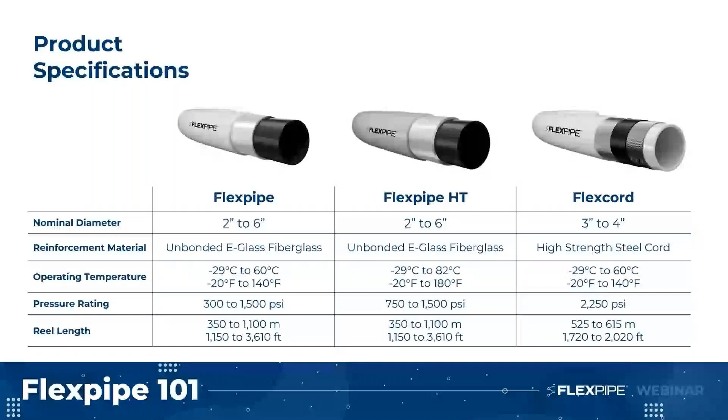So moving on to talking about our fittings. We have 3 different fitting types that we offer. We have a pipe-to-pipe coupling, a flanged end fitting, and a weld neck fitting. The pipe-to-pipe coupling is used to connect 2 reels or 2 pieces of Flexpipe together. The flanged end fitting has lap joint flanges. They're free to spin, so when the bolts are tightened up, it allows for easy connection without stressing any existing flanges. And the last one is the weld neck fitting. This one is used to connect an existing steel pipeline to a Flexpipe pipeline. And these are available in ENC, or electroless nickel coating, or in duplex stainless steel.

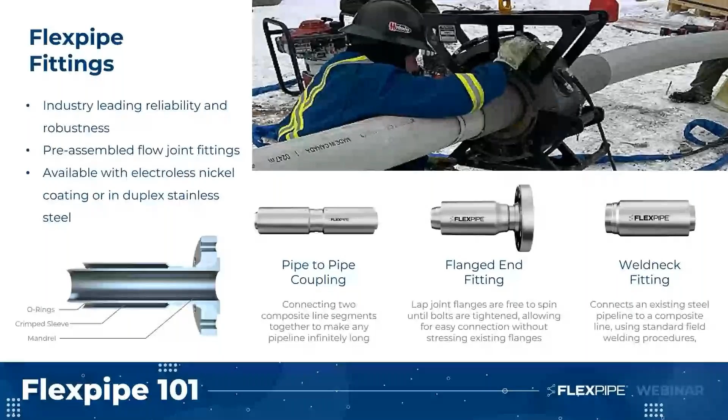So our fittings are designed and tested in accordance with our industry standards. This includes NACE MR0175, or for all my brethren and sisters north of the border, CSA Z662, and also API 15S. Our fittings take around 20 to 50 minutes to connect per coupling, and that depends on the size.

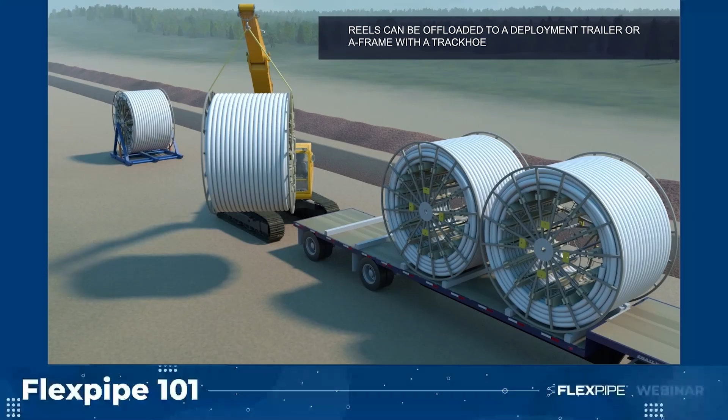So next we'll watch a little video. So trucks can haul anywhere from 2 to 6 reels, depending on the pipe size. Our 2 through 5 inch pipe is on a 12-foot diameter reel, and our 6-inch offering is on a 14-foot diameter reel. Reels can be unloaded with the appropriate weight rated crane, track hoe, or forklift as long as the forks are long enough.

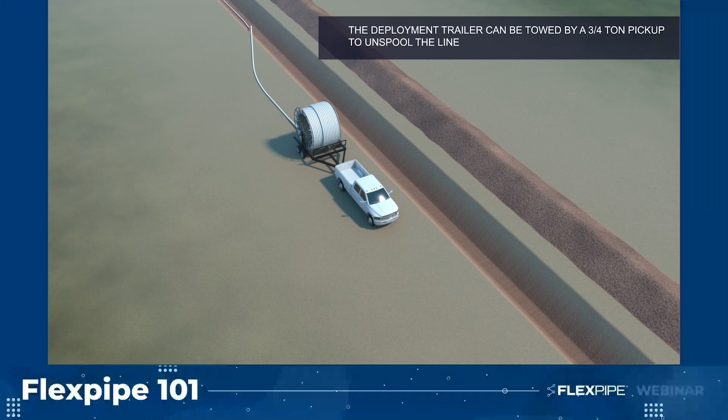We offer a couple of different types of deployment methods. One of them is the deployment trailer. This can be pulled behind a 3/4 ton pickup or other piece of equipment. We also offer stationary A-frames, and these can be deployed with a vehicle as well, or another piece of equipment such as a track hoe or a backhoe.

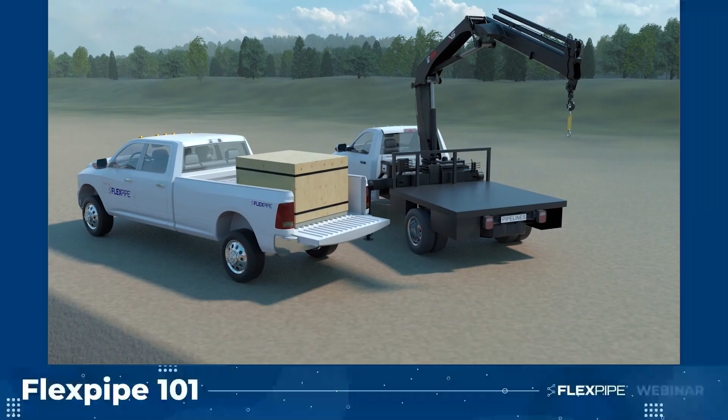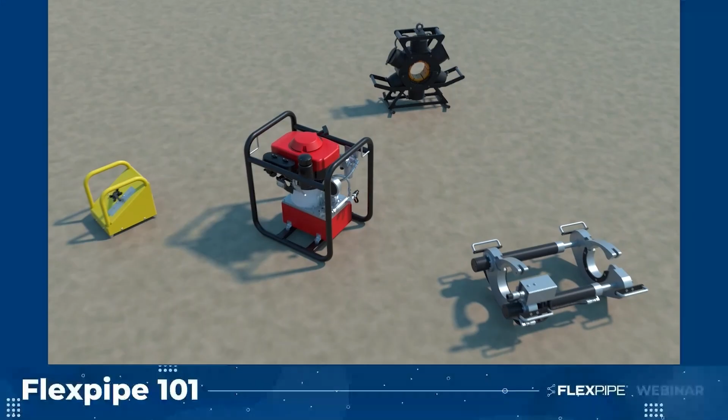Each one of our technicians have their own crimp kit that they'll bring to location, and these crimp kits have 4 major components. There's the power pack unit, the press, the crimper, and the remote valve. We talked about the 3 different types of fittings that we have: the couplings, the flanges, and the weld necks. Our fittings are designed in such a way that once it's inserted, the pipe does not pull away from the sleeve after the fitting procedure has been completed.

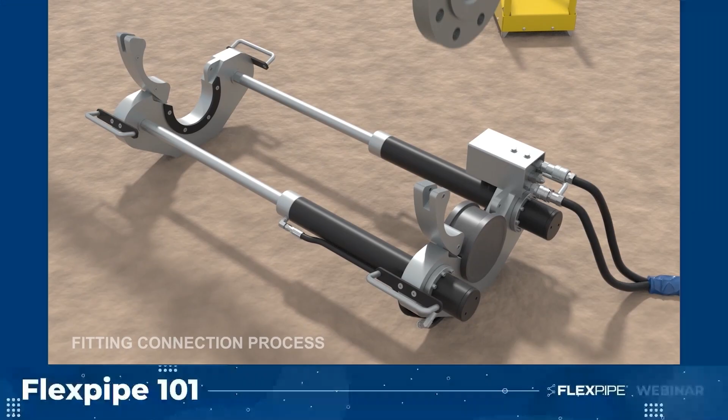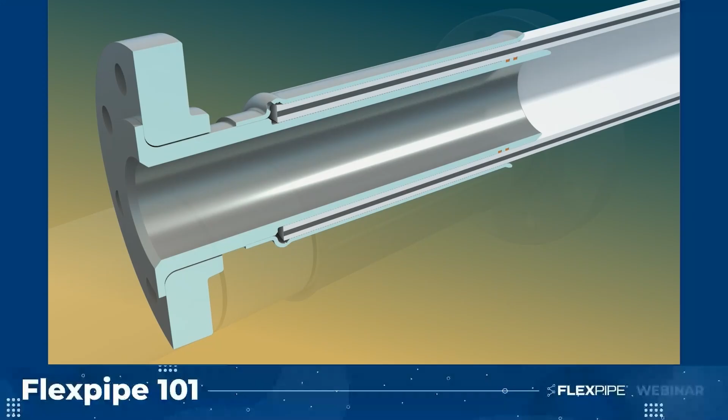Prior to pressing, we put 2 lines on the pipe. One of them is so that the clamp does not interfere with the mandrel. The mandrel sticks out just a little bit further than the sleeve, and we want to make sure that the clamp stays away. The second line is our press line, and we want to make sure that that line is not over inserted into the press. So once the pipe is inserted, the press is disconnected and connected to the power pack and the remote valve. A 4-inch fitting will take 4 crimps.

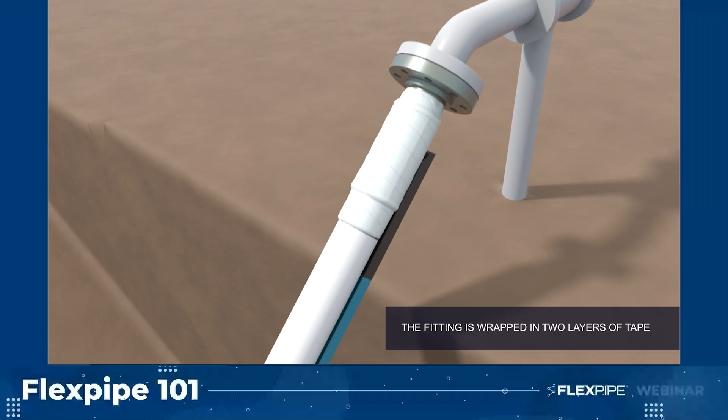Once that fitting is crimped, it'll be wrapped with 2 different types of tape, and at that time it's ready to be bolted up to the other flange or to the riser.

So moving on, we started off in 2001, and composites and Flexpipe have come a long way from where we began. Our first Flexpipe install was in 2003, and since then we've installed 50,000 kilometers of pipe, which is enough to wrap around the entire world. We currently have over 88 million feet of pipe in the ground in the U.S. And our patented composite products are world class, and they're used in various markets and environments around the world. We have installations in over 22 countries around the world, and Flexpipe has combined over 200 years of composite engineering experience and over 100 years of field technician experience.

So where can you find us? We have locations throughout Canada and the US in high operating areas, which makes it convenient for operators. This includes our manufacturing plant in Calgary, as well as our brand new state-of-the-art facility in Dallas, Texas that was commissioned in 2024.

So what is our pipe used for? Mostly our pipe is used for oil, gas, and water, and we do have a few other applications. For oil, we're looking at crude oil and emulsions, H2S, zero flaring. Water: source water, disposal lines, water injection, water transfer. For gas: distribution, fuel and lift gas lines, hydrogen and helium, 100% CO2, and biogas. Some of the other applications we've been used for: mining slurry, diesel and refined chemicals.

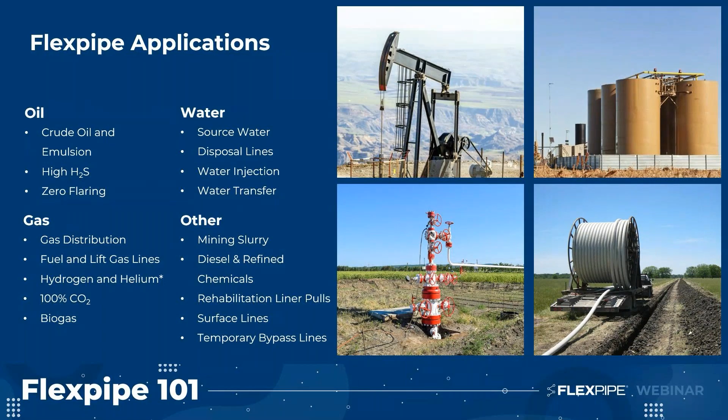We've also been used for rehabilitation liner pulls. This has become quite popular over the past several years, where we can take our pipe and pull through an existing failed steel line. We're also used on surface lines as well as temporary bypass lines.

For deployment methods, trenching is the most common installation method that's used for spoolable composites. Basically, the installation can go just about as fast as the ditch can be opened up. Next popular one is surface lines. And this is due to the low cost and the short time required to install the pipeline. And it is possible to deploy up to 25 to 50% faster than steel.

Plowing and chain ditching are also very successful, especially in areas with little pipeline infrastructure. This is due to low impact and the installation pace. As you can see in these photos, there are little right-of-ways required for these methods, and it's possible to install up to 2,000 to 4,000 meters a day in this manner.

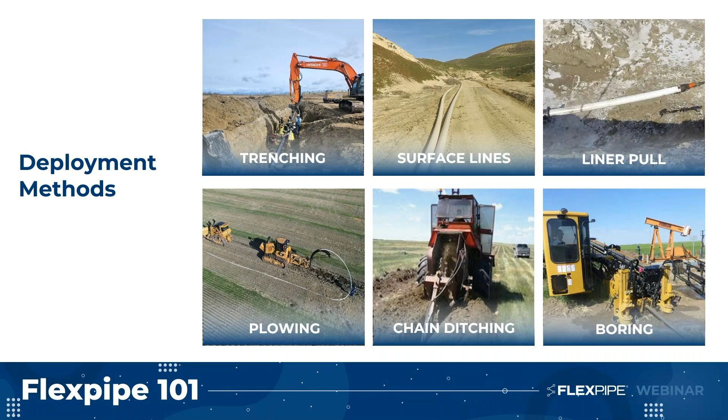Horizontal directional drilling or boring has typically been used for road or terrain crossings, but it has become the preferred method for some users due to the minimal environmental impact. In most applications, it's reasonable to pull 2 full reels of pipe to an existing line, and in some instances, we've achieved even longer.

So benefits of FlexPipe. Lower life cycle costs for the total life of the pipe. This includes installation and operational. This is compared to steel. HDPE, or high density polyethylene, is resistant to corrosion, has a very low coefficient of friction, and so there's a lot less abrasion. Our spoolable pipe comes in long lengths, therefore you're using less connections, and fittings are fast to install and repeatable. Our pipe provides industry-leading reliability and very robust testing.

We follow all industry standards, and we also offer a digital solution to keep track of your installations and your product inventory. We train contractors, and our team provides support through the entire installation process, starting with the account managers to the project coordinators, application engineers, field technicians, and our employees at our local service centers around the country. Narrow right-of-ways create less environmental disturbance. So this is suitable for lower impact installation like HDDs and plows.

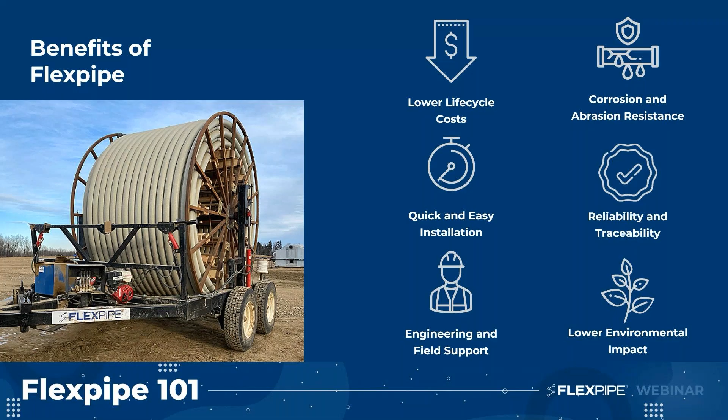And our manufacturing process is less harmful than steel, leaving no epoxies or harmful resins in the air. And the long length reels allow for less trucking. So comparing a 4-inch pipeline cost, steel to FlexPipe, you can expect a 20% reduction in the overall cost compared to the steel, as well as a 30% lower installation cost. And this is namely due to smaller crew sizes, less equipment, and faster deployment.

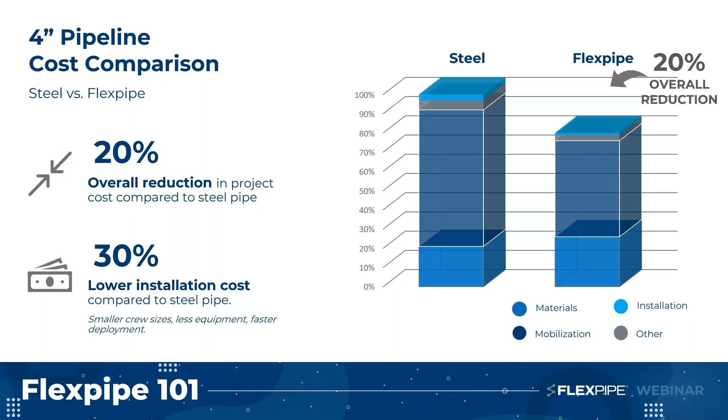This next slide highlights the difference between a 4-inch steel pipeline and a 4-inch flex pipeline. As you can see in the pictorial, there are far less resources required for FlexPipe, and you only need about half as many people to install. There's also no X-ray requirements for FlexPipe, but X-ray is required for the steel line.

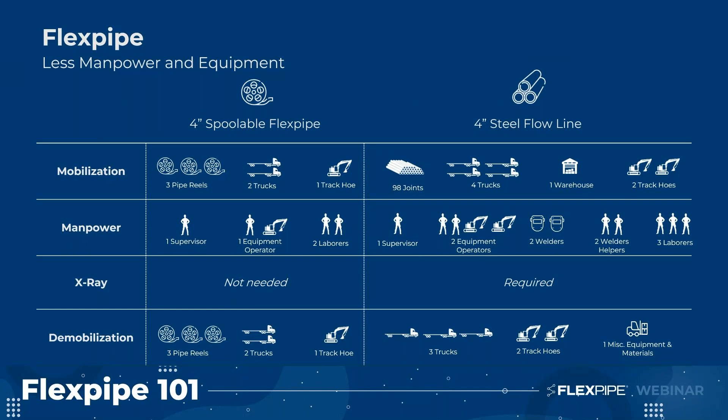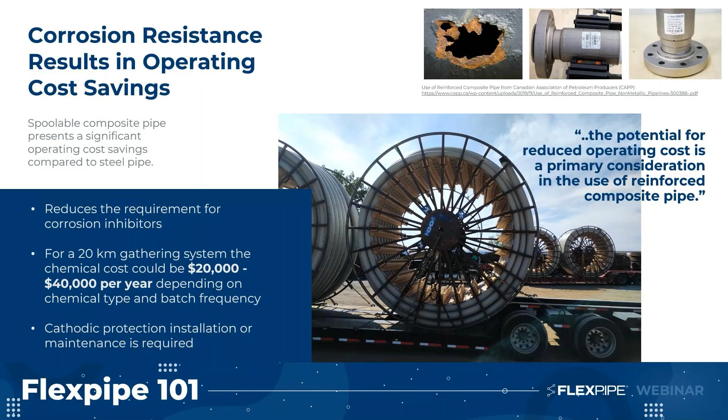Corrosion resistance is a huge benefit of FlexPipe, and it presents a significant operational cost savings. So for a 20-kilometer gathering line or gathering system, the chemical cost could be anywhere from $20,000 to $40,000 per year, and this is dependent on the chemical type and the batch frequency.

So at FlexPipe, we take pride in what we do, and we want to ensure that your application fits our product. When you buy from FlexPipe, you're going to have a team of employees that are going to work on the success of your project from the very beginning. Every project that we do goes through an application review by one of our many applications engineers.

And then after that project is approved, you'll work with a project coordinator to get the pipe, fittings, and technicians scheduled. We'll deliver the pipe. Our field technicians will show up and work with your construction crews to ensure proper deployment and fitting installation. And then once the job's complete, our PCs will work with you to return your equipment and any unused product.

Moving on to our contractor training program. FlexPipe offers a very robust training program, and this consists of theory and hands-on in a controlled environment. And then we spend time out in the field doing supervised installs on your location. No contractors are signed off until FlexPipe personnel are certain that each and every contractor knows and fully understands all of the FlexPipe policies and procedures.

Retraining is required annually, and we also do periodic assessments throughout the year on trained contractors, to ensure that all procedures are still being followed. All trainees will learn about all aspects of FlexPipe, including the pipe composition, deployment, fitting installation, as well as hydro testing procedures.

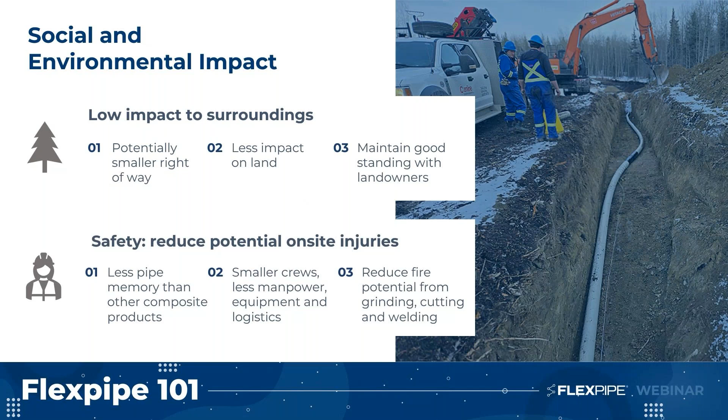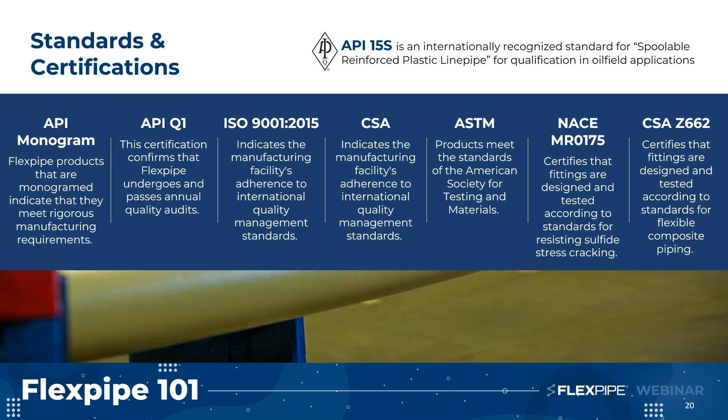So our standards and certifications: FlexPipe products are API 15S monogrammed to indicate that we meet rigorous manufacturing requirements, as well as API Q1 certified, and that confirms that FlexPipe undergoes and passes annual quality checks. Our plants are in compliance with ISO 9001-2015, CSA, and ASTM, proving that our facilities adhere to international quality management standards as well as meet the standards for the American Society for Testing and Materials.

So, testing our products. FlexPipe products go through rigorous testing to ensure that they are safe, rugged, and reliable. We have numerous quality control checks set up in our manufacturing process, to ensure that anything that's identified is rectified before it makes it out of the plant. All of our vendors undergo regular audits conducted in accordance with FlexPipe QC guidance, and they must provide us with raw material test reports.

Each reel of pipe that we produce is tested at the very beginning and the very end of each reel via destructive burst testing. And this is to ensure that the reel has met all the quality control requirements before being shipped out of the plant and to our customers.

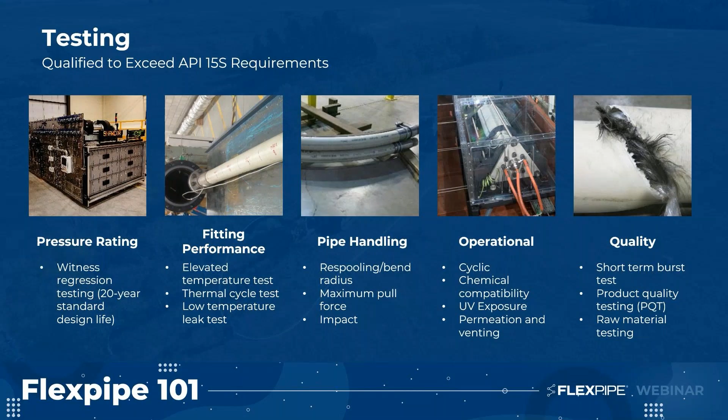Pulse is our cloud-based digital tool, and this is designed to help pipeline installation quality, traceability, and efficiencies. All of our technicians use this mobile integrity app in the field, and they enter quality data on both the product as well as the installation, including all GPS coordinates of your fittings.

Our FlexPipe web portal allows the end user to track project cost, monitor project status, and promote contractor compliance. When the job is complete, the end user has a QA/QC package that includes all pipe run numbers, serial numbers, GPS coordinates of all the fittings, as well as the installation data.